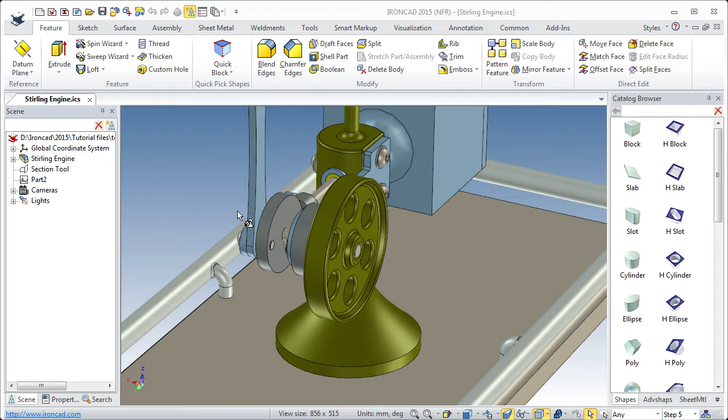We will continue to create an assembly instruction drawing. So we come up here to create a new drawing, and I will select the A3 template. To add a view, we click the Standard View button, and we come down here to click From Scene.

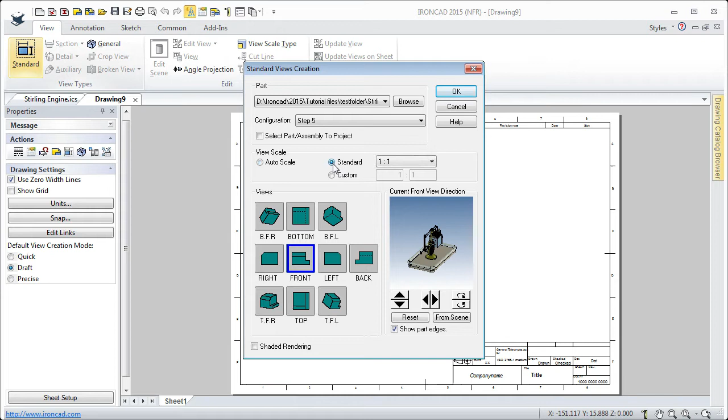This will be our front view, so I will click the front button, and for configuration I will choose step 5. I will click Standard 1:1, choose that scale, click OK, and I will place the view here. Now this view will be very large, but we will crop the view.

So when the view is selected, we come up here to the View tab. Here we find the Crop View button, and we click the button. We come to the Sketch tab because IronCAD wants us to draw the area we want to capture in our crop view. So I will click the Radius or Circle command.

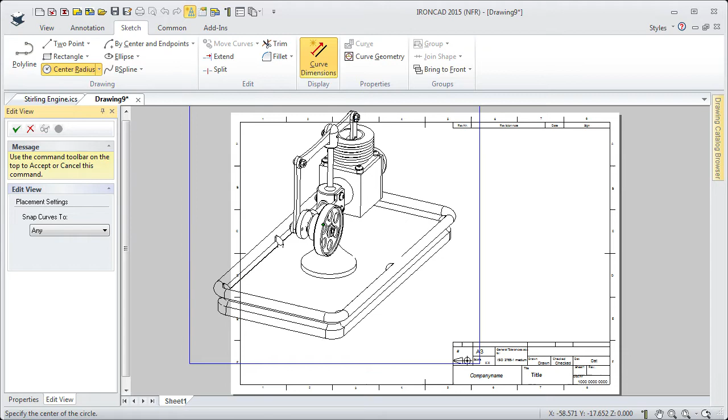I will zoom in a bit, like so. I will click here and draw the circle so that we can capture the area we want to crop. And when I'm satisfied with the circle, I will exit the circle command, and I move the circle a bit, like so.

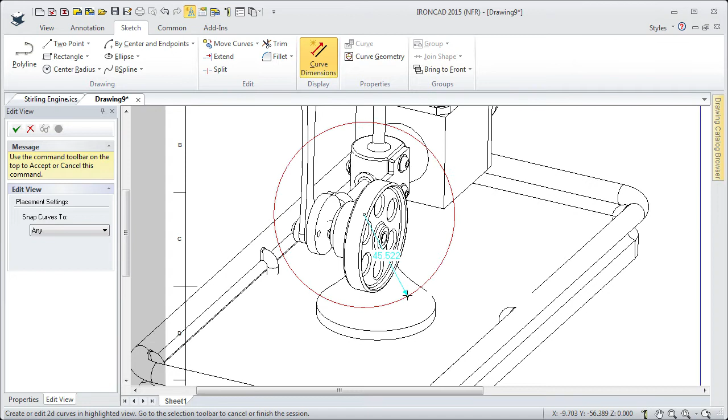If we want to change the radius, we can just grab the end point of this arrow and change the radius of the circle, around 45 millimeters. And then I'll click OK, and we will crop the view. I will move this view up here, like so.

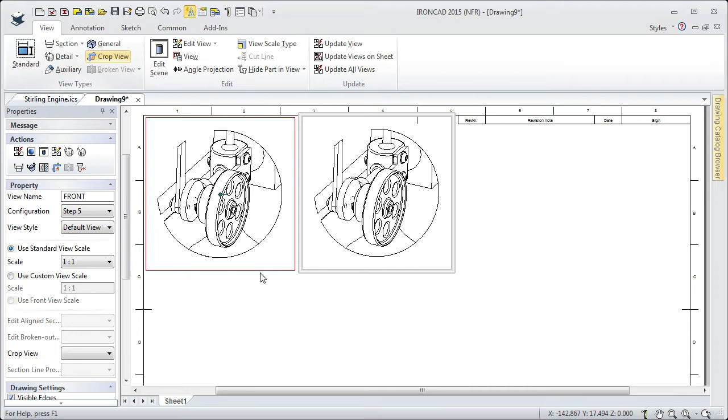And then I want to copy this view. I will grab the border when the view is selected and press and hold the Control key to copy the view. Like so. I will do it again. Grab the border, and I'll press and hold the Control key. And I will let go of the Control key and the left mouse button here.

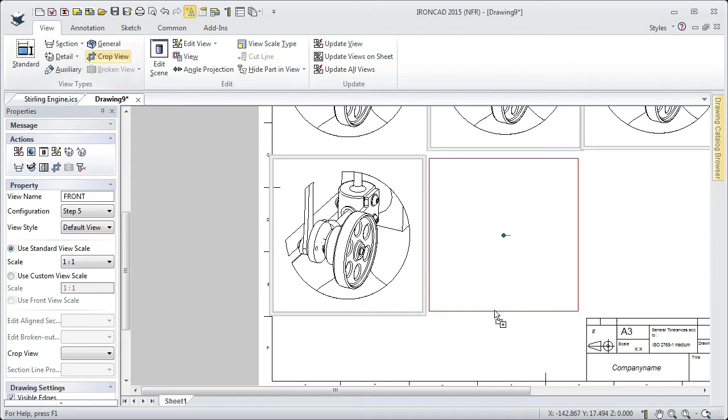And we'll also copy this view down here, place the view here, and I will do it again. Now we have 5 steps of this crop view. When the first one is selected, we come over to the property browser. We see configuration, step 5. Well, this one will be step 1. So we'll change that to step 1.

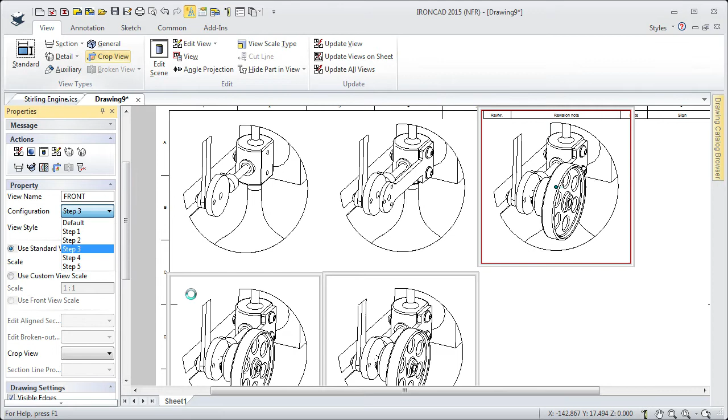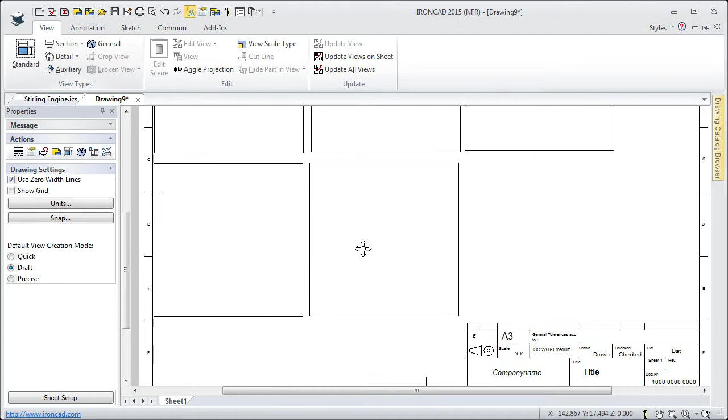The second will be step 2. I will select the third one to change that to step 3. And this one to step 4. And this border, the frame, tells us that IronCAD wants us to update the view. So I will right click and click Update, and the frame will disappear. Like so. We have 5 steps, and I will zoom in a bit.

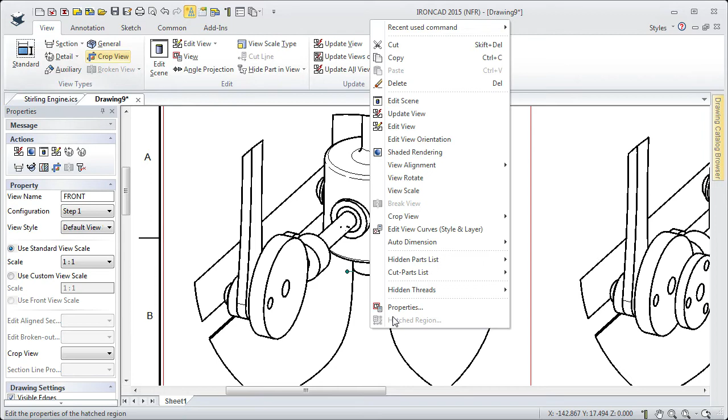When nothing is selected, we come over here to the property browser. We can uncheck this button. We see that we can see the width of the lines. And if we want to have a better view quality, we can select the view, right click and select Properties, and here we can click this button, Precise, and then we have a better view quality.

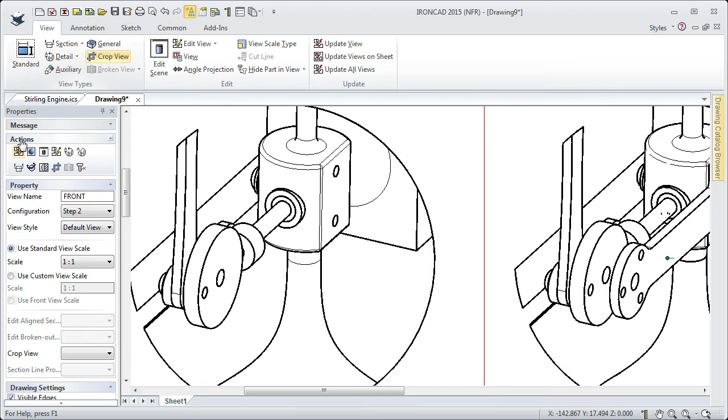But if we have precise view quality, there is no possibility to have a shaded rendering. If I select this view, because that is a draft view quality, we come over here to the property browser. We have Actions. We can also click this button, Shaded Rendering. So it means that we can print this drawing with color.

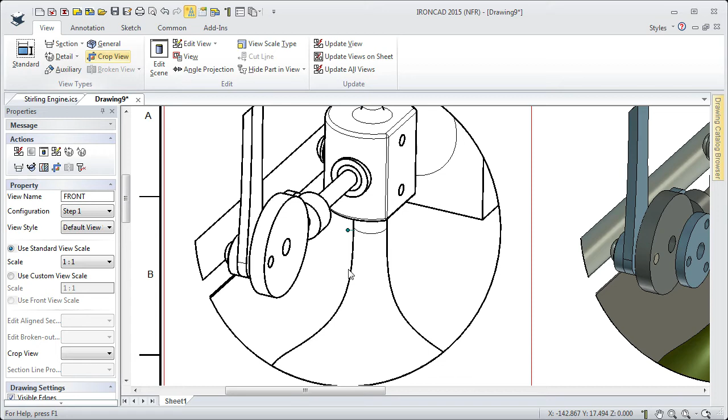But it's not possible when the view is set to precise view quality, because when you select this view, we see this shaded rendering is grayed out. But if we change the view quality, right click the view, Properties, and Draft, then it's possible to check the shaded rendering button.

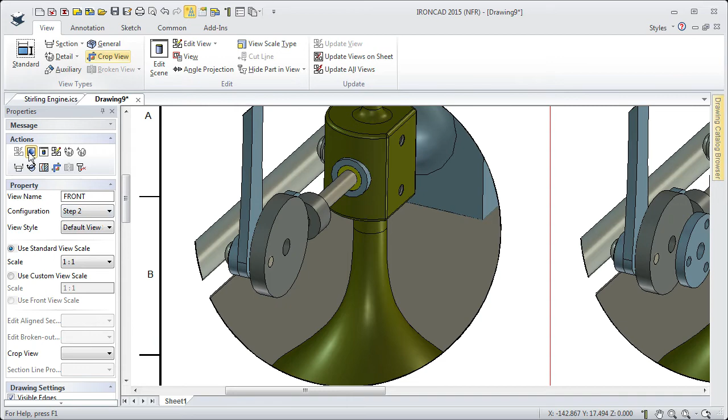But of course, if all views have shaded rendering, it will slow down the graphics. So in my case, I will select the views and uncheck this button. It's easier for me to handle the drawing with my computer and my graphics card.

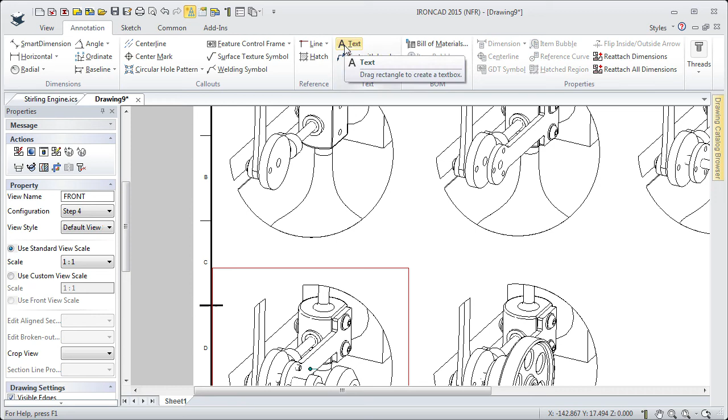It's also possible to add some text to explain what is going on in the views. So for instance, I will come up here to Annotation and we have Text. I will click and draw a window and we can type the text, step 1. Click outside, then when it is selected we come over here to the property browser. Here we have different text styles. I will click text 8.

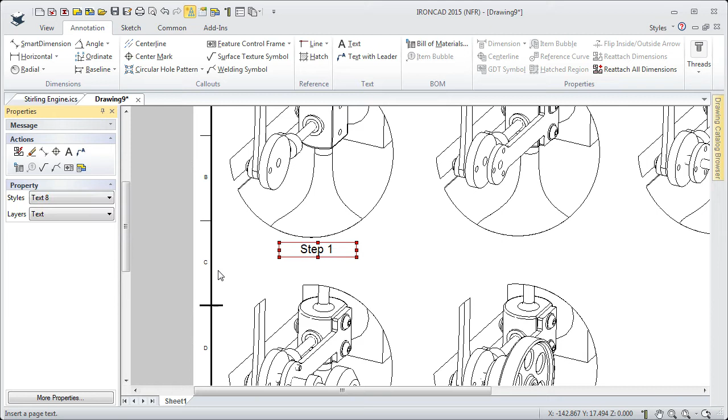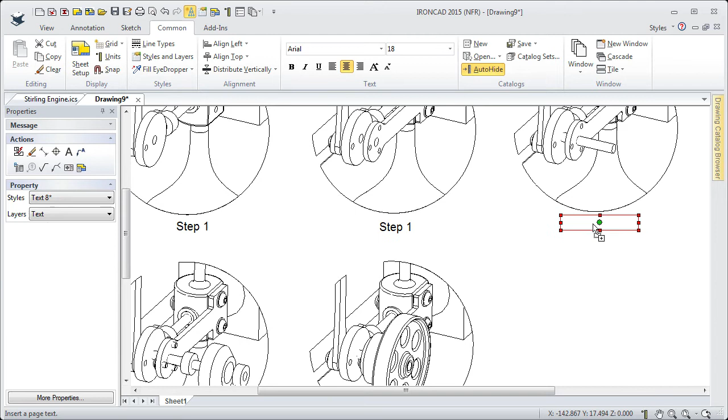But we can also change it here. If we come up to the Common tab, we have the possibility to change fonts and also the font size. And we can also copy this text box. I will grab the text box. I will press and hold the Control key to copy it, and I will copy it to all views. Like so. And I will also change the text.

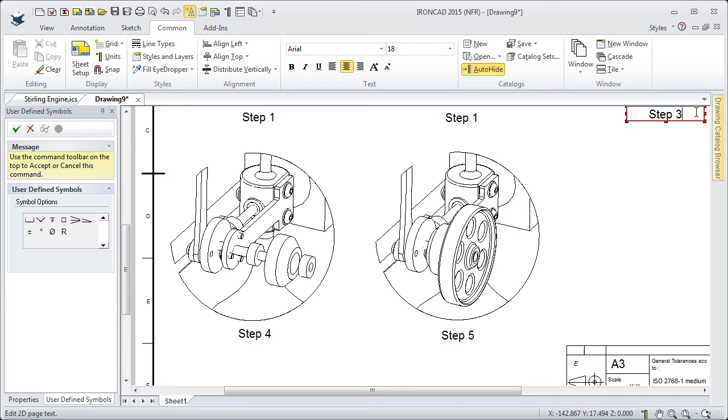This one will be step 5, step 4, step 3, and step 2. And we can also add a leader. We come up to Annotation, Text with Leader, to explain what is going on in the view.

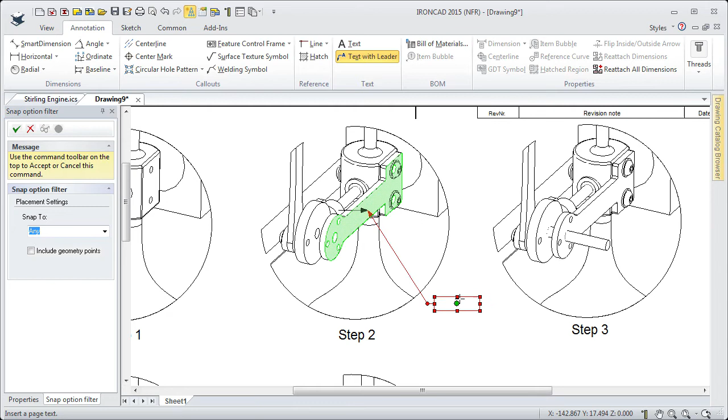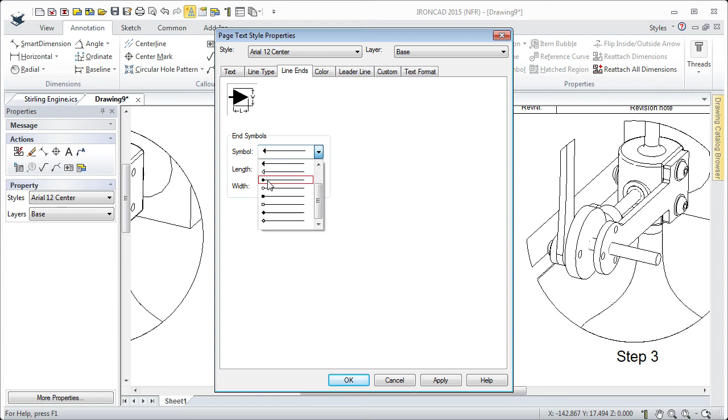For instance, if I click the bracket, drag the leader and the text and drop the text here, I can type bracket, like so. And I can also right click the arrow to choose Properties and Line Ends. Perhaps I want to have a dot instead of an arrow. Click OK. We can change the properties of the leader or the text with leader.

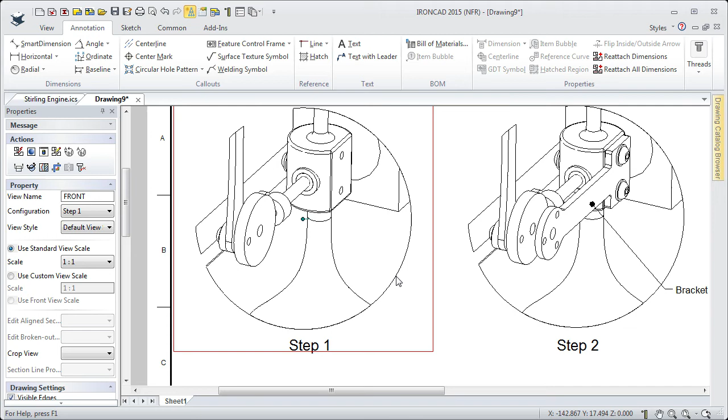If we find the circle too large, or we want to change the area of the crop view, we can select the view and right click, and over here we find Crop View and Edit Crop. We can select the circle. Here we can change the radius, or draw another type of area with a polyline or rectangles and so on. So that's a possibility we have.

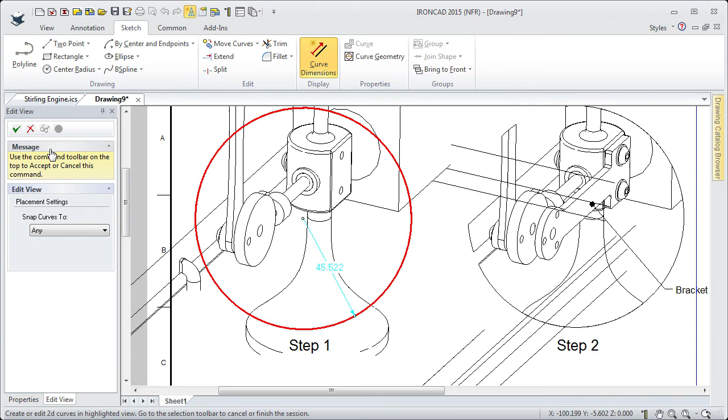Well, if you want to save this drawing, you can save it in different file formats if you want. If you click the menu button, File and Export, we have the possibility to save it in different file formats: JPEG or PDF or EPS, for example, or a DWG drawing. So in that way you can, for instance, add this instruction to an instruction book.

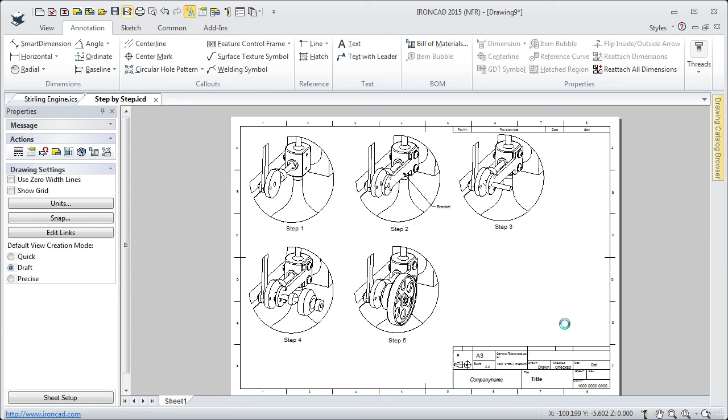So I will click Fit Sheet, and then I will save the drawing, Save As. I will call the drawing Step by Step. Like so. I will save the drawing. And then I will close it, and I will also close the engine.